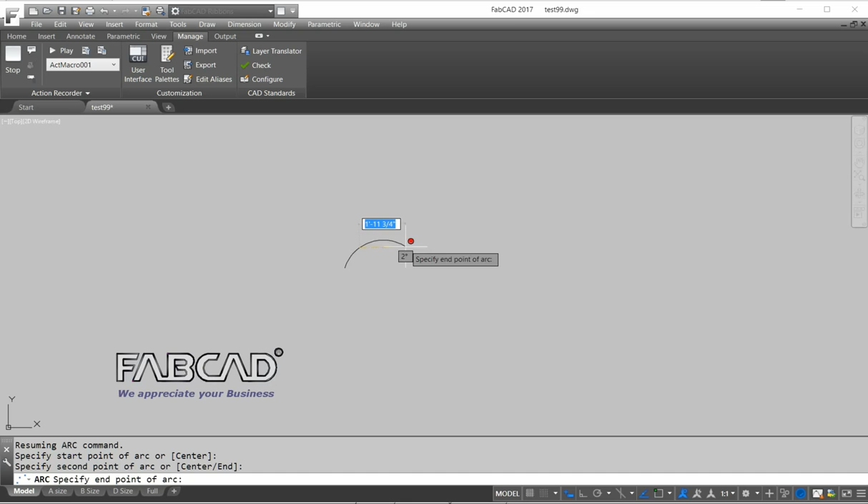And then underneath here, there's this other button that says pause for user input. So I'm going to click that. And then I'm going to pick a point and then drag it around to there. Right click again, and just create a simple scroll.

Then when I'm done, I'll click stop. I'll call it Scroll 2.

Okay, so now it says pick a start point. I pick a point and it replicates the scroll just like that.

So if you have a routine that you use quite often, all you do is simply record it. You can prompt the user with a message, and then you can also pause the macro to put in any user input like a length or something like that, and then continue on. Then you just record it as if you're doing it manually, and then save it, and then you can replay it. It can turn out to be quite a productivity tool for you.

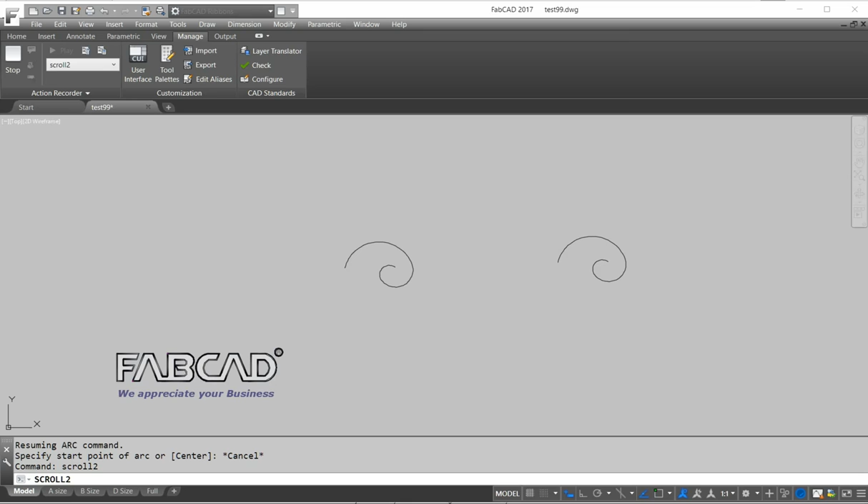Now we talked about grips, so I'm going to come in here and take this one scroll that we've created, and I'm going to join it into one piece, and then click on it, and you see grips. Now one of the nice things about the newer grips are that they have these rectangular grips which affect a larger area of the arc that created this scroll.

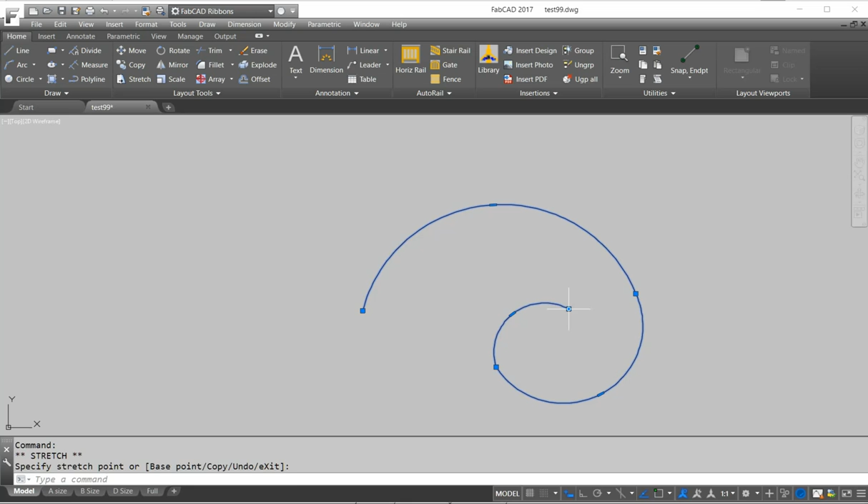Okay, and grips can also be used as snaps. So we could offset this, and in the scroll lesson I did earlier, we used the grips as a snap. So they function that way also.

Now, also, let's go up here to this railing up here. Let me erase these dimensions. I'm going to go ahead and I'm going to do a linear dimension between here. Put on snaps. Here. And here.

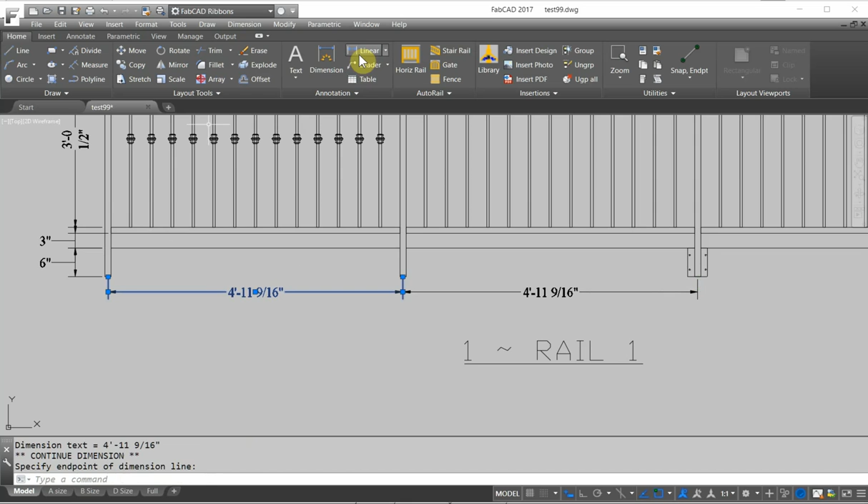When I click on these, when I lay my cursor over this grip, I get dimension options. That's a continued dimension, or if I wanted to get the center point of all these pickets from the end of the channel, I hold my thing here and do a baseline and just do the midpoint of these pickets, and you notice I'm just doing generates the baseline dimension.

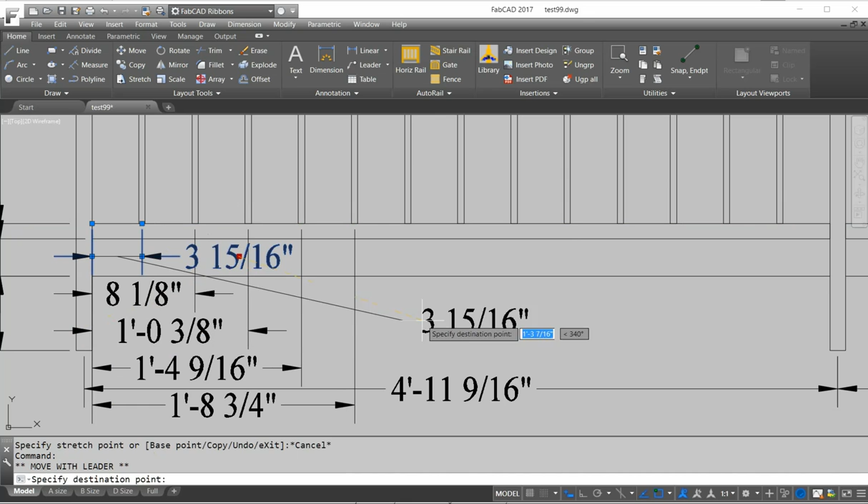You can also click on the grip and on the text of the grip, and I get options here like move with leader, which may come in handy. And there's other choices in here. Okay, so the grips have a lot more to them than just references or just things to grab and drag.

Well, let's say that you get a drawing from a customer and you're going to work on it, and then you want to bring in your own line types and layouts. Well, you can do that. I'm going to go to the library here, Design Center, and say you go up and you find your drawing.

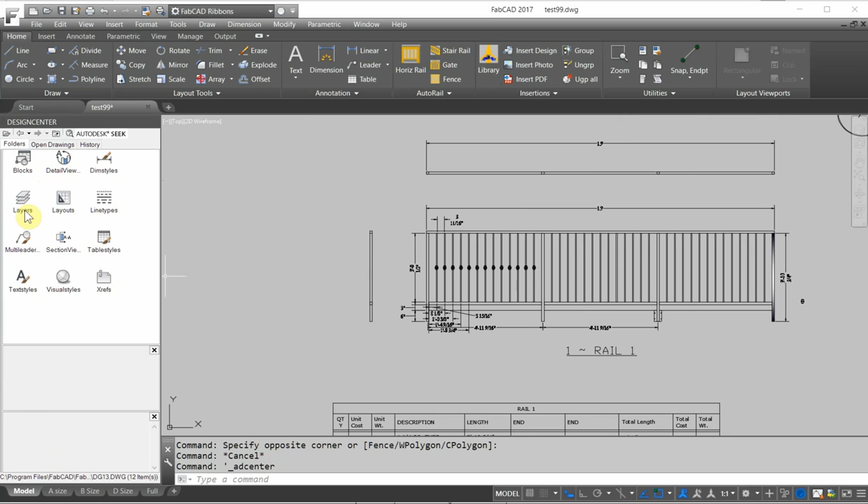So I double click on this, and you notice that it brings me into what's inside the drawing. Blocks, layers, so I double click on the blocks, and I can bring in, just drag the blocks in from that drawing. I can also bring in layers, okay.

I can bring in line types. See if I want to drag this in. Okay. I can bring in layout tabs. So where are the layouts right here? Okay, I could bring in one of those.

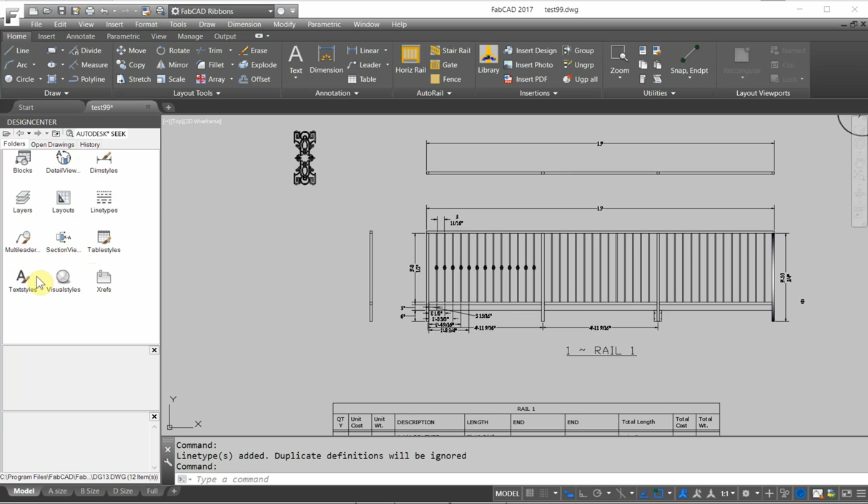So you can bring in various items from one drawing to the other through the Design Center. External references, table styles, text styles, dimension style, all kinds of good stuff. So this is a very powerful little tool to help you speed up getting your drawing set up with the right variables from an existing drawing that you already have.